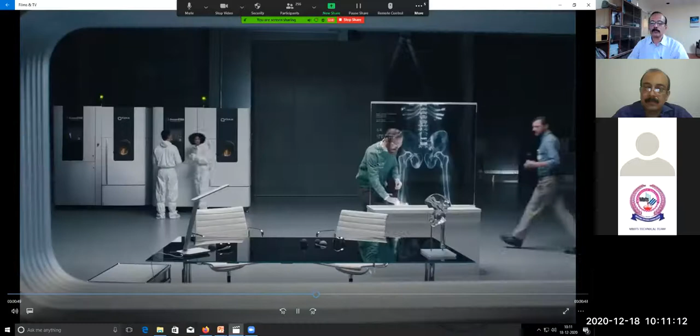And inside the factory, what did she find? A brilliant invention, one of a kind. "3D printing magical parts to help the whole world. A magnificent find for one little girl. As she departed, her mind did sing the song of a factory that can make anything."

So that is it. So slowly this 3D printing is going to revolutionize manufacturing, and instead of very specialized operations, you are going to have factories that can make anything. That was what the video was about.

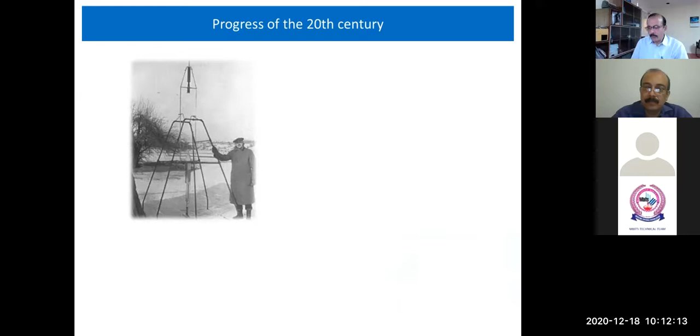Now, coming to the progress of the 20th century, I put a picture here. How many of you know who this gentleman is? He's none other than Goddard. Then this is the first liquid engine ever made by mankind in 1926.

Now, over a couple of decades, if somebody can have a look at this and guess what this is, this is the F1 engine of the 1960s, which propelled mankind onto the moon. So you can see within a short span of around 34 to 40 years, mankind went from a small liquid engine to a huge, massive liquid rocket engine, the size of say 7 human beings and another 3 humans tall. So these are the remarkable progress of the 20th century for mankind.

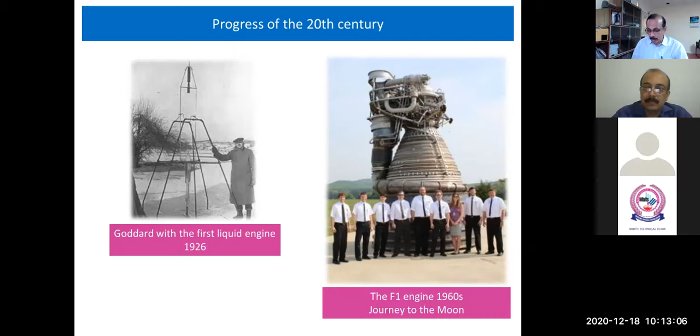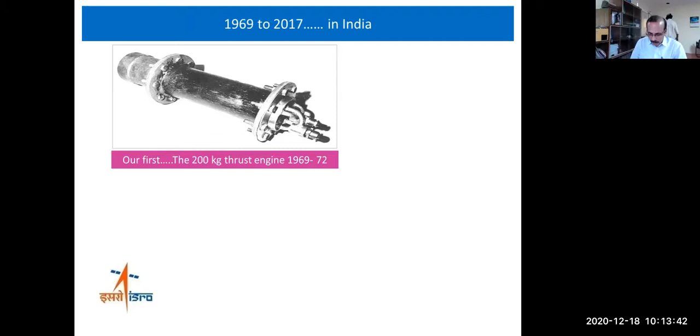Now coming to India, what happened? ISRO was established in the year 1969. So then what happened? If you see a picture here, probably not many will be able to identify what this is, but this is our first engine. This was our first liquid engine. This was made in 1969, 72. And let us see what has happened.

Now, in 2016, we made our first fully indigenized cryogenic engine, the CE20 engine, which delivers an amazing 20 tons of thrust. So from 200 kg all the way up to 20 tons. And it is this engine that propelled our Chandrayaan-2 all the way to the moon.

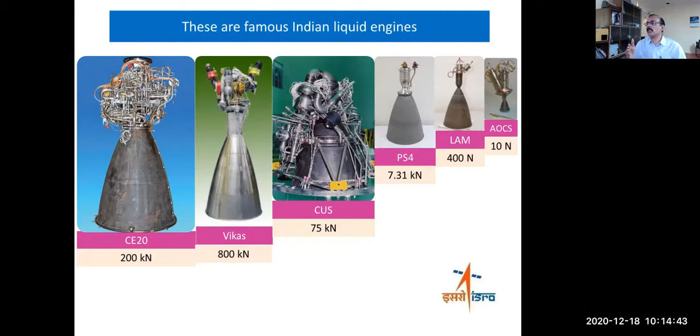And now, these are some of our famous liquid engines, the host of liquid engines that we have. Starting from the left, we have the CE20 engine, then the Vikas engine, then the CUS engine, which is the first cryogenic engine. And then the workhorse engine, the PS4 which flies on the PSLV, and you have all those satellite engines, which we call the LAM and AOCS thrusters. So you can see the CE20 engine, which has got a 200 kilonewton thrust, all the way down to 10 Newton AOCS.

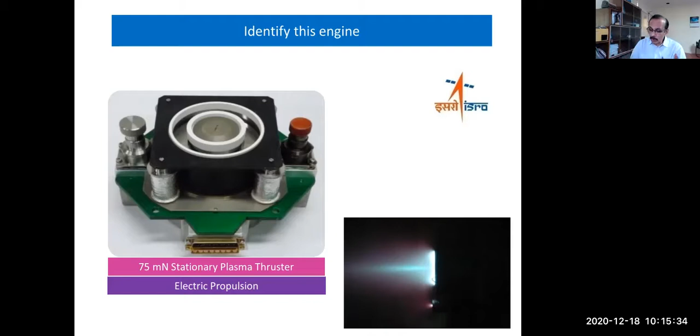And if I have tickled your imagination, this is what we call an electric thruster. So what is the thrust? 75 millinewton. So we started from 200 kilonewton and we are now at 75 millinewton. So a host of engines and thrusters have been developed by ISRO.

And then the question is, why do you require so many rocket engines? The speaker has presented 3 slides full of rocket engines. Why do you require them? Now, can anybody take this question? How many rocket engines are in a PSLV?

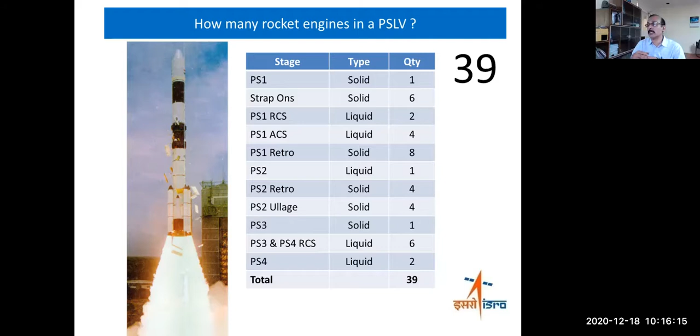So you can start counting. Somebody will count 4, 10, 20. The answer is 39. So one PSLV flies with 39 rocket engines, not all very big ones, including the small ones. They are all rocket engines. So this is why we say there is an amazing scope for 3D printing in aerospace.

So probably at least some of you, the next generation who are listening to this, will finally be working on an additively manufactured rocket engine here in ISRO. So this is our dream.

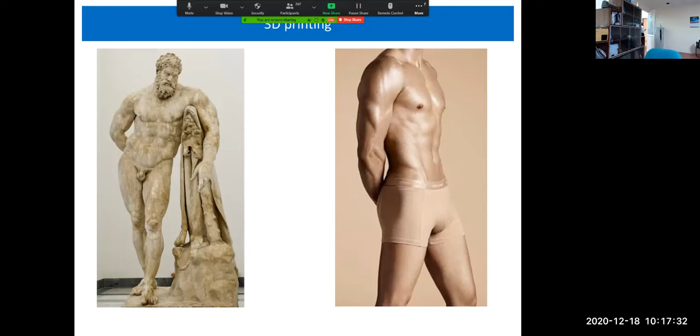Sorry, gentlemen. So probably I gave you a little bit more time.

Now this is it. The first one on the left is the subtractive manufacturing. The first one on the right is the additive manufacturing. Left, yes, how do you make this idol? So you take a big piece of marble and then you have a sculptor, Da Vinci or somebody, goes and sculpts chip by chip, it is removed and then it comes out as a marvelous sculpture. Whereas on the right, you see, that's a human body.

So I would say human body is the ultimate of additive manufacturing. Just imagine how small you were when you were born, 2.7 kilos or 3 kilos, and look over a period of time how you built yourself up from inside. So I would like to say human body is the ultimate of additive manufacturing. And why do you say? Just look at the muscles. This is the same thing that additive manufacturing can do. That is, you can have topology optimized designs.

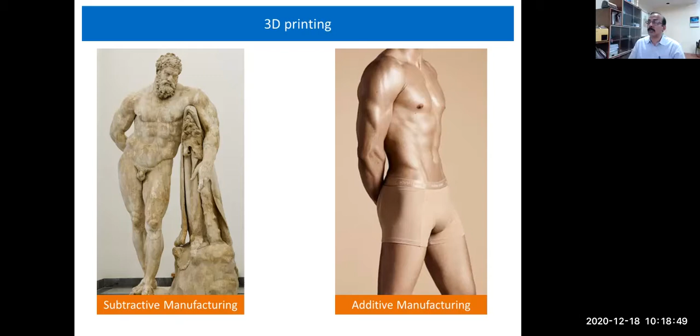If you want to have good biceps, okay, you work out on your biceps, you build up your biceps. If you want to have a six-pack, okay, you work out on your stomach abs and develop the muscles. This is the same thing that probably 3D printing can also do. Just look at the one on the left and one on the right. Yes, I would say that is topology optimized on the left, and on the right you have a failed additive build.

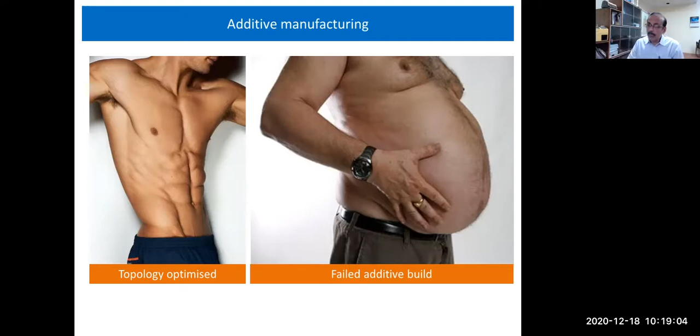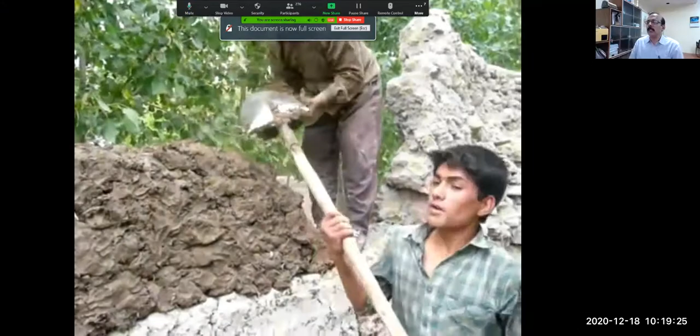So here, according to me, 3D printing is a primitive concept, but a promise of the future. Now, why do I say a primitive concept? I'll just put a video. So if you can see this, I would say this is 3D printing. Probably many of the new generation would not have seen this, but the older generation definitely will say, how do you build this? So you are building it layer by layer. Just look at the skill. So you build it layer by layer. This layer by layer building, according to me, is nothing but additive manufacturing.

But why do I say the promise of the future? Here comes the next video. The same thing, this is how you can 3D print and build a house. This is a 3D printed building. So this is what is happening. This is why I would say it is a technology, an old technology, but this is what is going to happen as a technology of the future. And this is the promise of the future.

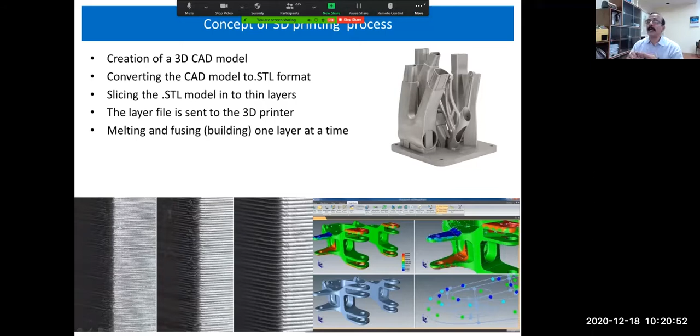Now, the concept of 3D printing, many of you would already be knowing, and probably the last two speakers would have gone through this. My presentation would not be technology packed, but a little bit more interesting for the laymen and the students. The technology of 3D printing is you have a CAD model, you have an STL format, you slice it into thin layers, and then you print it layer by layer. So you melt and fuse layer by layer. So this is the concept of 3D printing.

But this is all told in very simple language. When you apply that to aerospace, it's something a little different. It's not doing hobby work. It's a bit complicated. Imagine that you are going all the way from here to Delhi. Probably you will take a taxi to the airport, catch a flight, go to Delhi and take another taxi from the airport. Yes, that's a hobby job.

But then just look at the American president coming to India. Some of you know he has his Cadillac One. So the car has to come from there. Then if he has to move from the Ahmedabad stadium to the airport, he requires a helicopter. So the helicopter has to come down. Then from Ahmedabad, he wanted to fly over to Agra. His Air Force One doesn't go there, so he had to bring his Boeing C-32. So all these things have to come in advance.

So in a similar way, when it comes to aerospace, 3D printing is typically an all-encompassing process model. So you will require a good CAD model. Not only a model, you will require good CAD processing files and processing hardware.

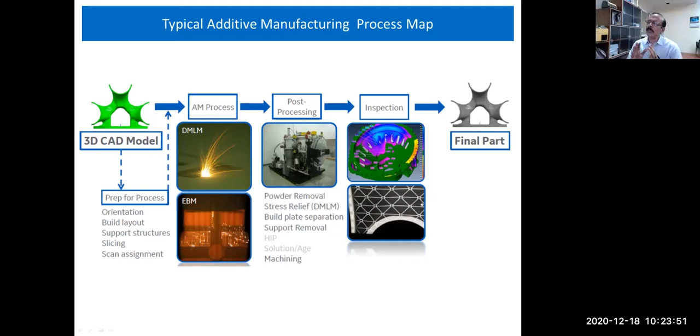Yes, when it comes to aerospace, inspection is very, very important. It can be an X-ray, it can be a dye penetrant test, and on the higher end, you can go for a CT. And then finally, you go for a final part. So when applied to aerospace, 3D printing requires a little bit of holistic thinking. So these are some of the benefits that we derive.

The manufacturing costs are going to be high. And you have a limitation on the build size. And of course, existing designs may not always be suitable for 3D printing. So you might require a changeover to design for 3D printing.

So the most popular 3D printing is the DMLS or the SLM, selective laser melting, or direct metal laser sintering. All this comes under the powder bed fusion technology, wherein you lay out a powder layer, then you fuse it, and you put the next layer on top of that, and then again fuse it layer by layer. So this is how it goes.

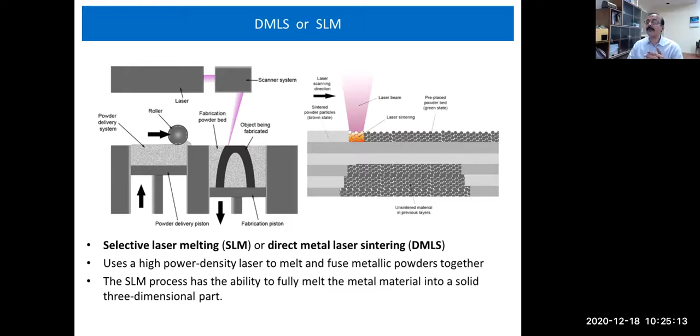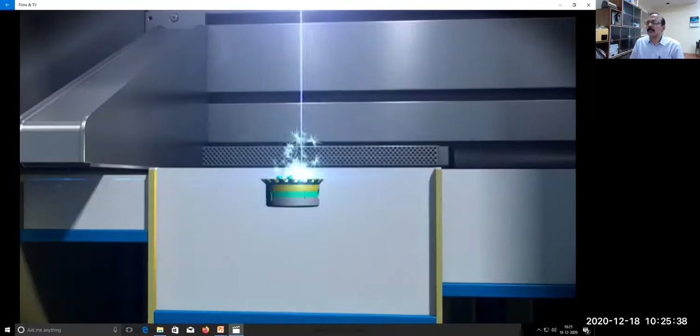So just a video of that. This is how it happens. You have a computer which slices the image. You have put one layer. The layer of powder is added. There you are selectively melting it. The next layer, melt, layer, melt. So you again melt, and finally you have a finished part like this. So this is the DMLS, or the powder bed fusion.

And then for larger parts, we have something called laser engineered net shape, what we call LENS, wherein you have a deposition head, which has got a laser head, and a powder dispensing nozzle. The nozzles dispense powder, and a laser beam comes in and melts it. The entire thing is mounted on a gantry or a machine that manipulates your nozzle so that you get your part. These can be used for much larger sizes.

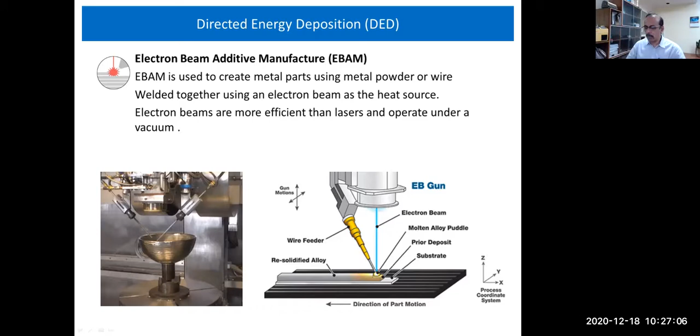And then you have something called electron beam additive manufacturing. Almost the same as LENS. Only thing is that with the laser you are using blown powder, whereas here we use wire as the raw material. An electron beam comes and melts the wire, and with the same manipulation of the machine on different axes, you build a part layer by layer. The advantage of electron beam over laser is that it operates under vacuum, so you don't have the challenges of corrosion.

Now, for any scientist or any artist or any human being for that matter, what is the advantage? The additive advantage is, one part and you have limitless possibilities. So what is it that you want? The one in the middle was my requirement. I wanted 4 holes and 2 holes on the fork. Then you can do it any way that you want. All the others, 8 different versions. So one part, you can have 8 different concepts.

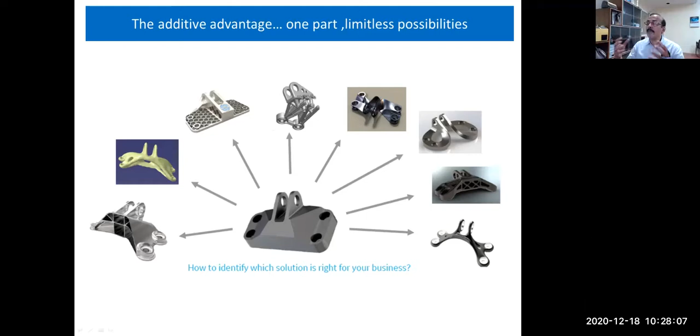So this is the advantage. You have one part, you have limitless possibilities. You want to make it look good? Yes, you have a design. You want to make it robust? Yes, you have a design. You want to make it lightweight? Yes, you can have a lightweight design. So this is the advantage of additive.

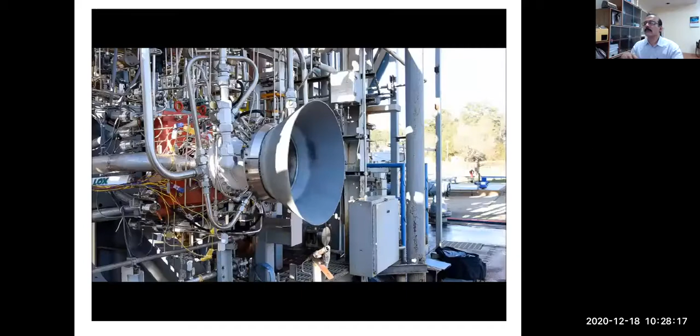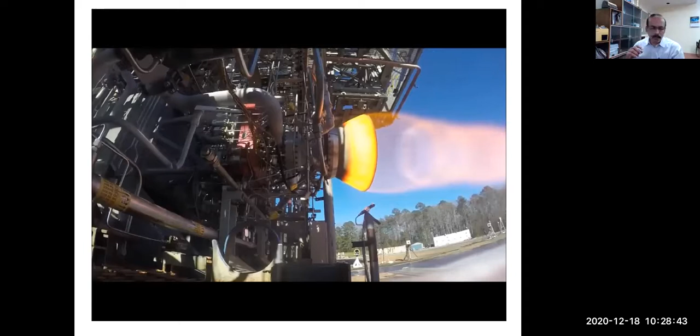Gentlemen, if you are seeing this video, what is this? So this is the first additively manufactured rocket engine that has been fired by NASA. You can see a rocket combustion chamber fully additively built and which has been fired at NASA. So this happened in 2018. So in May 2018, they printed this 3D printed thrust chamber. So they say the test duration went for around 25 seconds with 100% power, and the hardware still remains in

a great shape. So what prompted NASA to go into 3D printing? So they have a goal, and their aim is to reduce time and cost. So all American products are expensive. Probably if they want to compete in the market with the Chinese or the Indians, they have to reduce the cost. So how do you reduce the cost? You have to reduce the time. So this is what they are looking at. Reduce the time and cost towards building a rocket engine. So this is what they did.

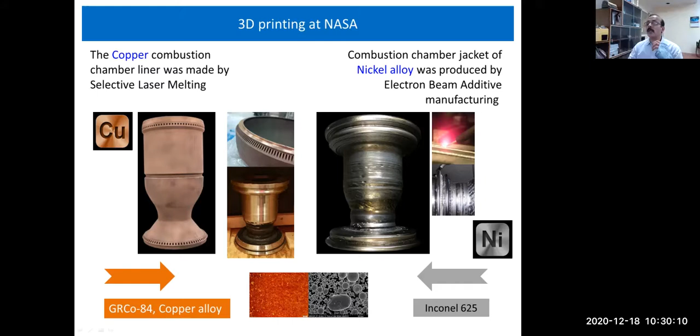This has got a sandwich construction. So most of the cryogenic rocket engines will have a sandwich construction. The inner core will be made of copper. This is what you see on the left side. And you can see on the figure which I am pointing to, there are a lot of channels, coolant channels on that body. So the copper has got a very high... and the heat has to be taken out. So that is taken out by coolant flowing through these coolant channels. So the copper gives you conductivity, permits you to take away heat.

But then what is the minus point? The minus point is you don't have strength. So what is it that you want? You will like to have a jacket over it. So what they've done is they've put a nickel jacket over it. So this nickel jacket gets you the strength. So this is what you have, a combination of a copper alloy and a nickel being printed. So according to the information available, this copper liner was built by selective laser melting, that is DMLS, and then the nickel layer was built by electron beam additive manufacturing. So you have a hybrid process coming up in 3D printing.

You see this? And this work was done by 3 NASA centers. So there was one center working on the powder, another center working on the chamber, and another center working on the nickel jacket. And you see, there were around 200 intricate channels, and this whole chamber was built of around 8,255 layers of copper alloy. So then the question is the time taken. How much time did it take? What was the big advantage? Anybody can make a guess. So they say it was printed in 10 days and 18 hours.

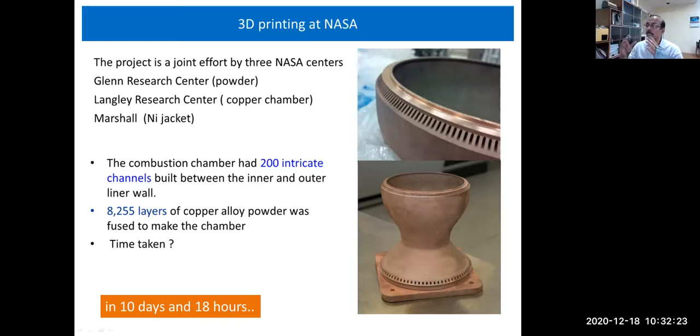So ISRO are also making these double wall chambers the conventional way. For us, this takes a minimum of around 6 months. So you have a copper sheet, then you form it, then you deep draw it, you cut all the channels, then you machine the edges, then you go for brazing and all that. It takes approximately 6 months. So compared to the 6 months, the advantage these people have is 10 days and 18 hours. It is not that they just plugged in a printer and started a stopwatch and in 10 days it came out. Definitely the developmental time would have been much higher. But ultimately the result is they can print in 10 days and 18 hours.

And now NASA is also working on another program called RAMPT. So their idea is to build a whole thrust chamber with additive manufacturing. So you have bimetallic manifolds, then inside you have copper, then you have a composite overwrap. They're talking about composite 3D printing. And you have a free-form nozzle using blown powder laser technology. Using laser technology, you will be making the nozzle extension. So this is what they have in mind.

And now in LPSC also, this is what we have in mind for our LOX methane engine. We are also planning to have a double wall construction, where the inner will be copper and the outer will be made of stainless steel, with approximately 300 channels.

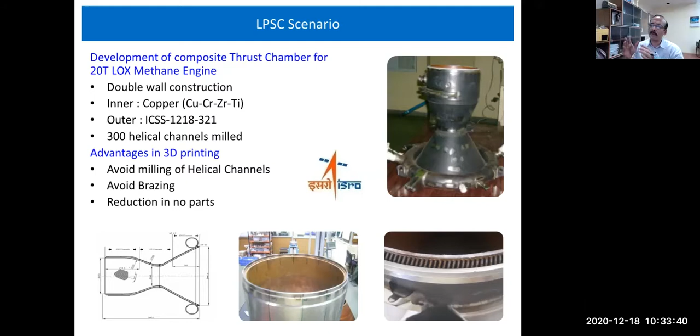So we will be avoiding all the brazing, and we are also aiming for a reduction in number of parts. Of course, this is just a dream now, but we have to work on this. And probably this is one challenge for at least some of the youngsters who are listening: a fully 3D printed rocket thrust chamber in India.

And coming to Ariane, the Europeans and their Ariane. Okay, so they are also into 3D printing. So they are talking about an injector head. Normally an injector head, this is an injector head for the upper stage, the rocket engine. So now what do you have?

In an injector element, in the conventional process, you will have around 8,000 holes which are drilled in copper sleeves, and they are all screwed onto 122 injector elements. So you have 8,000 holes. They are made of different number of parts, 122 injector elements. This is the conventional way of doing it.

Now, what is their idea? By 3D printing, this entire thing with the injection nozzles, the base plates, the front plates, the manifold, etc., everything they want to print as one integrated component. And they are also working on it. I think you can see in the picture that they have already been successful.

So the advantage is, they say the total components is cut from 248 to 1. The figure on the right side, made of 248 parts, has been reduced to 1. Normally, in a conventional process, this takes around 3 months, casting and a lot of machining, 3 months. But they have done this by 3D printing.

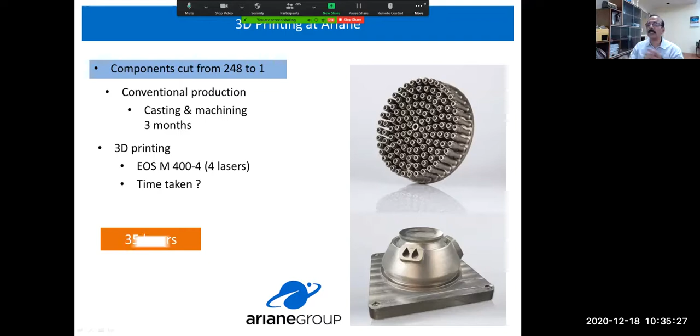So can somebody imagine what is the time taken? Any guess? Yeah, here it is. It's just 35 hours. So from 3 months all the way down to 35 hours. So this is the progress that they are trying to look at. And at LPSC also, our aim is, for our LOX methane engine, to print this injector head as one integrated component.

And definitely, ladies and gentlemen, it's not that you can just simply take any design and print it as a component. These types of complicated parts have to be designed for 3D printing to be realized. So we have to work on design for 3D printing also.

Now, Ariane is also working on a next generation rocket engine called the Prometheus. They want a very low cost engine, at least 10 times less than the present engine. This is what they are working on.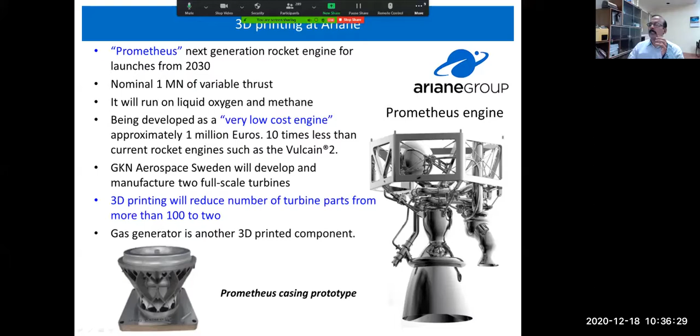And the turbo pump of this particular rocket engine, they are planning to 3D print it. And their aim is to reduce the number of parts from 100 to 2. So just look at it. From 100, they want to reduce the number of parts to 2. So this is the advantage they are working on.

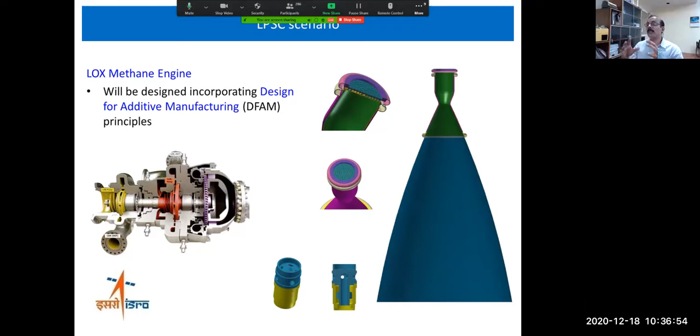And this is the same challenge that we are also working on for the LOX methane engine, the same engine that I have been talking about. We are also working on a turbo pump made through the additive manufacturing route, giving us advantages of time and cost.

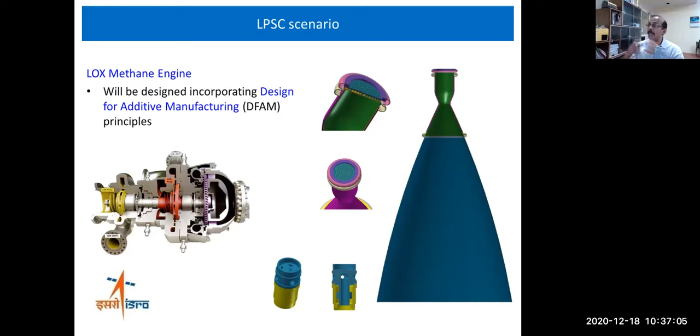So what has happened? The total nozzle earlier used to be made of 1,000 parts. Now it is made of just 100. That means the parts count is less. What happens? Definitely the cost also comes down, and the spin-off is reduced production time.

This goes on to the Dragon spacecraft. Around 2 months back, they had the first successful flight of a spacecraft from SpaceX all the way to ISS, and it was repeated also last month. So these are the 3D printed engines for the launch escape system.

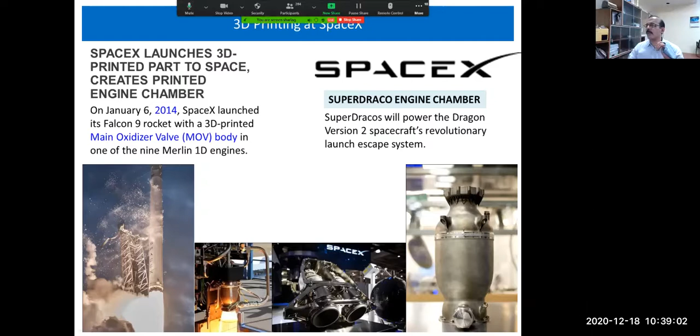Any manned mission will have a launch escape system for the humans to escape the launch vehicle in times of a catastrophe. So what they have done is they have 3D printed the entire SuperDraco engine.

Normally in all rockets, if you have a pump, the pump has to be rotated. So to rotate a pump, we will have a turbine which is driven by hot gases. But what these gentlemen have done is, it's a small rocket engine, so they did away with the gas generator generating hot gases, and instead they put in a battery and a motor to drive the pump. So it works on an electric motor. So you can say, okay, space is also moving electric.

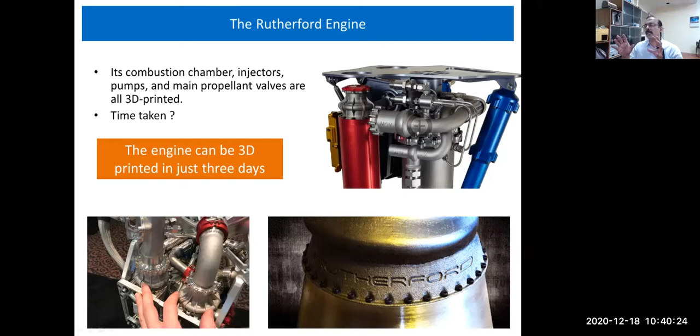So this particular engine was also largely printed by 3D printing. You can see the combustion chamber, the injectors, pump, the main propellants, all these were 3D printed. And if you can just guess what is the time taken. See, gentlemen, this engine can be 3D printed in 3 days. So this is the type of reductions that these people are working on. An entire 3D printing happening in 3 days.

And in the LPSC scenario, we also don't want to be left behind. Okay, you can say we are also trying to copy. Okay, no problem. We make a very honest and a sincere copy. We are also working on an electric pump for the LOX methane engine, which is going to be additively manufactured.

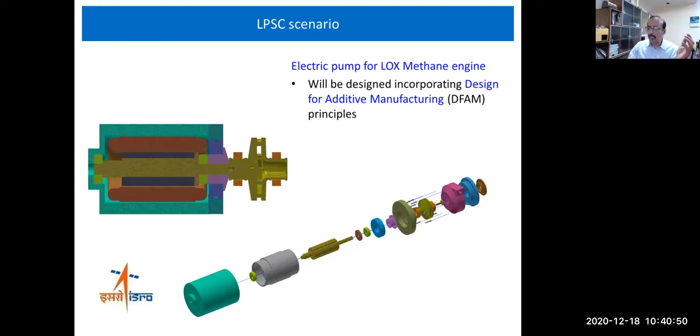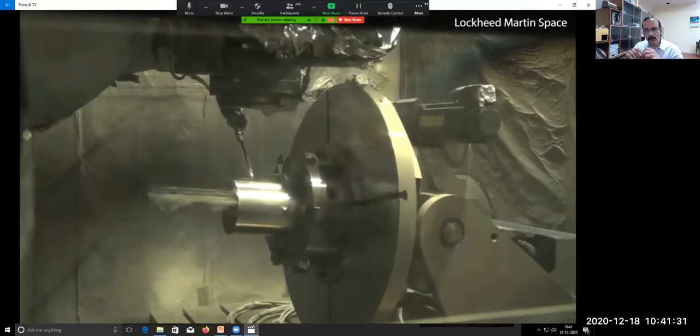Am I audible, sir? Yes, sir. You're audible. So this is one problem with the net. You do not know whether you're audible, whether people are responding, and all that. Okay, that is a challenge.

Just look at how electron beam additive manufacturing works. So you have an electron beam. The bright spot is the electron beam, and you have a wire. Probably it is hidden there. And you have a turntable which rotates all around, and material is deposited layer by layer. There you see the shape has almost come. Now the shape is recognizable. There it becomes bigger and bigger. So that is electron beam additive manufacturing with wire.

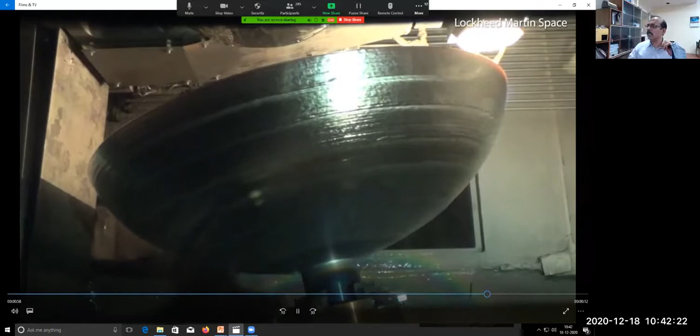So you can see how they're there. This is what they're targeting: twice as fast at half the cost. So that's a multiple of 4. They want to do it 2 times faster and do it at half the cost. So you can see this whole titanium dome by 3D printing. They have reduced the timeline. So you can try to fill up the blanks here. They have reduced the timeline from 2 years to 3 months.

So one satellite tank, which used to take a long time from billet. You start from a billet, you convert it into a forging, machine it, EB weld and test and all that. You will take 2 years from material to a finished product, whereas in EBAM, you are reducing it all the way to 3 months. Just imagine the amount of reduction of work in process inventory. The work in process inventory is reduced to a large scale. So all these things are going to reduce the cost of any rocket engine.

And you might say, this is going to be a challenge. What is the benefit that we have? Now, the lesser the cost, you will have more people coming in. You will have startups. You will have new people with lesser finances coming in and coming out with technologies for telecommunication, weather forecasting, or whatever it is, at much cheaper prices for the common being.

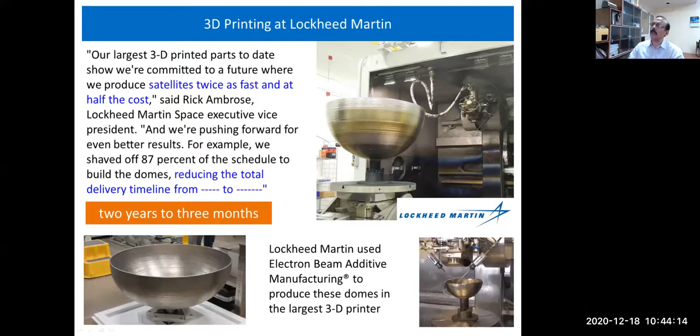Today, if you would see, at least in India, probably 80 to 90% of Indians are not connected at all. So they are away from internet. So the country has to connect. Yes, we have to work on low-cost solutions. And we are also working on the 400 dia propellant tank by 3D printing.

Then there is a company called Relativity Space. It's again in America. They're talking about from raw material to flight in less than 60 days. This is what they are talking about. From raw material to flight in less than 60 days. Now, you have heard of SpaceX, Blue Origin and all that.

We all consider them as pioneers, who work on cutting edge technologies. But there were two gentlemen who were complaining. They were working in SpaceX and Blue Origin. They were complaining that SpaceX and Blue Origin are not doing enough in 3D printing. So what did they do? They came out and started a company called Relativity Space.

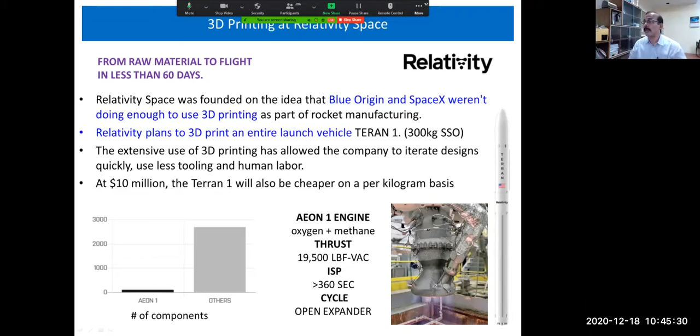And what is their idea? Their idea is to print an entire launch vehicle. Just imagine an entire launch vehicle, not a turbopump part, not a thrust chamber, not a tank. They want to print the entire launch vehicle by 3D printing. And they are saying that this will be the cheapest on a per kilogram basis. So for that, what is it that they are doing?

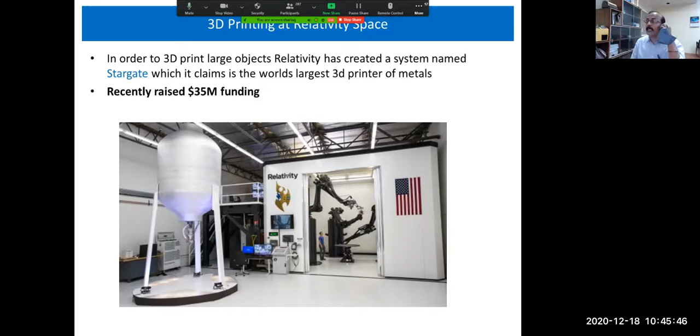They are building a 3D printing machine as huge as this. You can see, compare it to the scale of a human being there. And it is not a crazy idea. They were able to raise funding of up to $35 million. And just look at their trial 3D printed rocket stage. This is what they're talking about: print an entire stage by 3D printing.

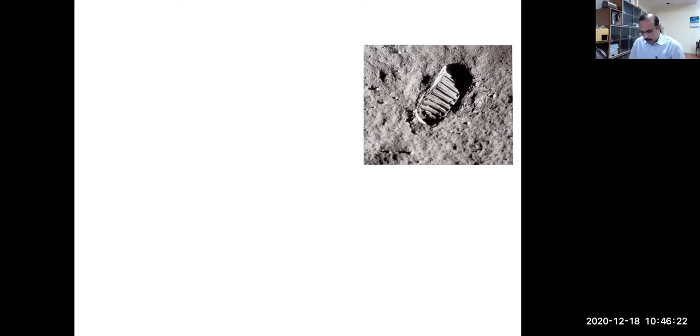Now, gentlemen, this is a very famous photograph. Can anybody imagine what it is? Maybe the elder generation might understand it faster. Yes, it is Neil Armstrong's footprint on the moon. Now, why is it that you have such a big impression? It's because of the lunar dust. There is a thick layer of lunar dust, and the particle size is on average only around 70 microns. Does it give you an idea? A very small size of dust available.

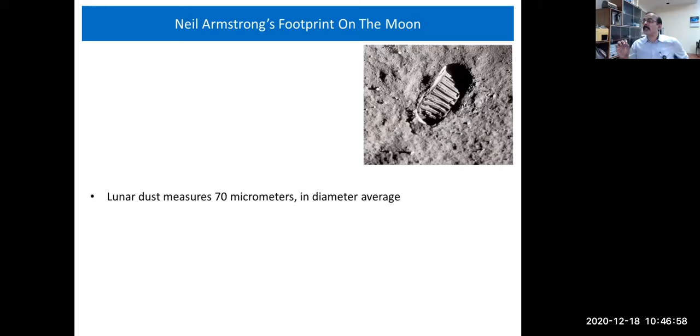Now, this is the best raw material for 3D printing. You can consider building a lunar base with 3D printing. You have the lunar dust available. You mix the dust with a binder and spray it. You have 3D printing machines working on it, and then you have a binder salt that can be applied to it. And what is it? You can build an entire habitat.

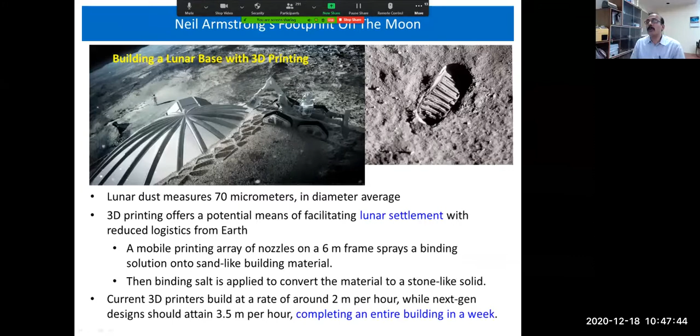Now they are talking about 3D printers which can build around 2 meters per hour. So you can think of printing an entire building in about a week. So you want to have a settlement on the moon? Yes, you have the raw material readily available there. And NASA has also worked on this. There is a 3D printed habitat challenge, a $3.15 million competition to build technologies to have a habitat on the moon or Mars or wherever it is.

And what is the spin-off? How many of you know that Velcro, the Velcro that we always use to fasten things, was a spin-off of man's moon mission, the Apollo mission? How many of us know? So similarly, you are going to have 3D printing in housing. It can be used for affordable housing on the earth when this technology is developed.

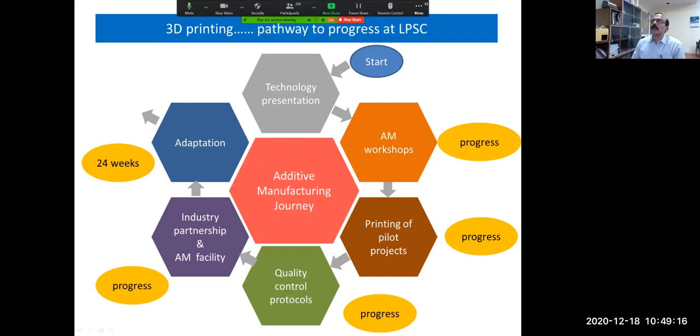Now, we are also not too far behind at LPSC. So this is our additive manufacturing journey. We start at the top right and move around in a circle: technology presentation, AM workshops, printing of pilot projects. All this is our pathway to progress, all the way from technology presentation to adaptation. And this is our roadmap. What we have identified is a DMLS process for parts up to 400 mm cube and an EBAM process for bigger tanks and sizes.

The benefits that we are looking for are complex shapes, weight reduction, monolithic construction, that is, reducing the number of parts, faster production, and design iteration. Suppose you're working on a LOX methane engine, you work on a prototype and then you would like to fine tune it. You would like to have the next prototype ready immediately. So 3D printing gives you that flexibility of design iteration and faster design to realization. And our overall goal is to replace at least 25% of the flying parts with 3D printing.

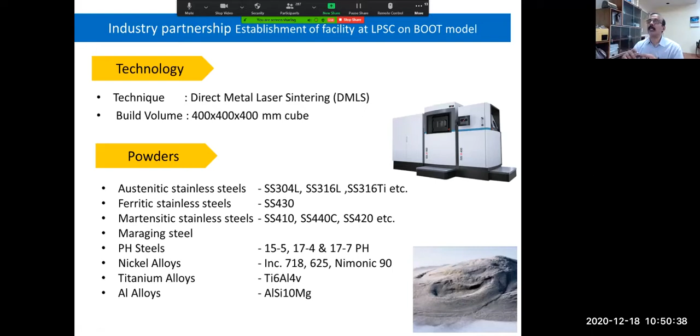We are talking about industry participation for establishing a facility at LPSC on the BOOT model. So we are inviting an industry to set up a facility at our own place. They can own the facility, and we will load them completely. That is the BOOT model, a build, own, operate and transfer model. The facility will be set up and run by an industry, and after 3 years, the facility will be transferred to LPSC.

So LPSC will provide all the civil infrastructure, and it will also give the work or completely load the facility during the initial 3 years during which time the industry is working on it. So now what is the idea of this? There is a thinking that we are already a little behind time in adopting 3D printing technology. So if you start reinventing the wheel, you will take a longer time.

So the idea is there are people who are already established, people who are experienced. You use their experience and do your parts, and then you slowly build up. You work with them and build up your expertise. And also the BOOT model permits a lot of design iteration. It permits experimentation, and it gives us flexibility in operation, so that the parts can be printed on demand.

Suppose if I want to give a part to be printed outside, we have all those procedures, commercial procedures. So we want to get out of it, have the facility here, and then you have the flexibility of parts. And then definitely, you have the lesser financial burden and all that. So we have already tendered out, and the process is already on. A lot of people are showing interest to set up a facility here in our campus and work with us.

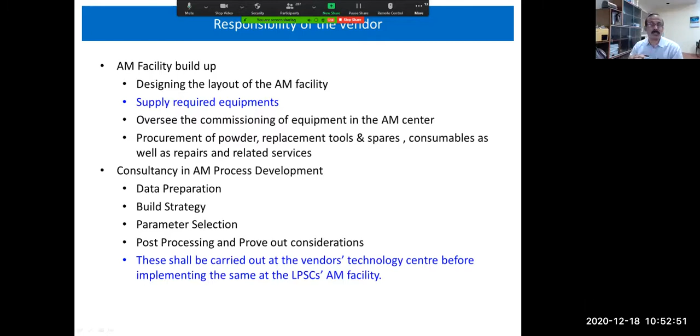So we have told this is the responsibility of the vendor. He will set up the facility here, and he will also give us consultancy in the process development. That is the data preparation, build strategy, parameter selection, etc. So we are riding piggyback. We are riding on somebody who is already experienced. I will not dwell too much on this.

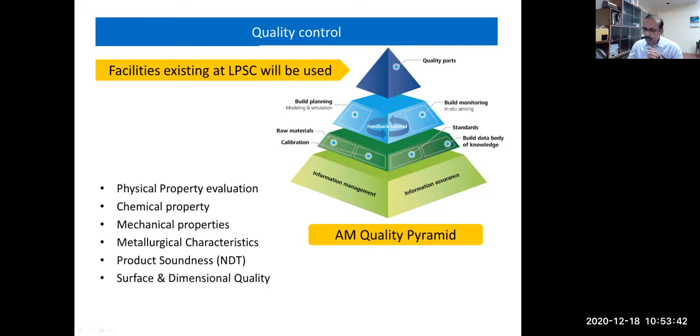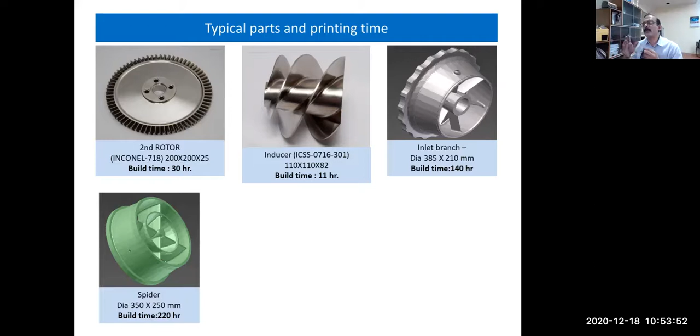And these are the typical parts that we have identified. You can see a host of complicated parts that we have identified that could be 3D printed. And there are some other parts that are highlighted here. These are structural parts, rotating parts, and functional parts. All this wide combination of parts we have already identified for 3D printing, and some of the interface elements also.

And we are also thinking about powder development for the future. So the future, I think, is the challenge for some of the youngsters who are listening to this. In a big way, we would like to go for 3D printing. It's not only just printing, go all the way back and develop powders also.

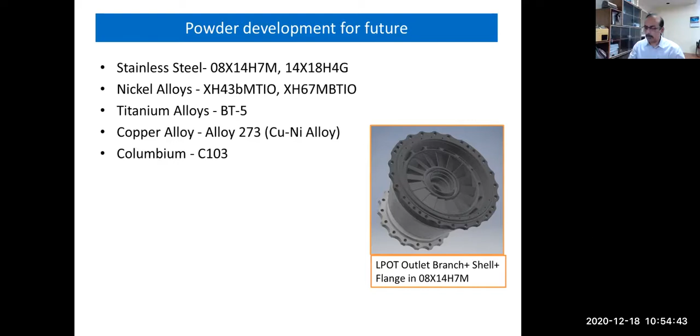And how does this attract us? Just look at the turbine parts. Just look at the blade profile. I've selected a particular turbine part, and you have around 60 vanes. What you can see on the right side is a shrouded rotor. So you don't have access from the sides. This is a closed rotor, so you have access only from the top.

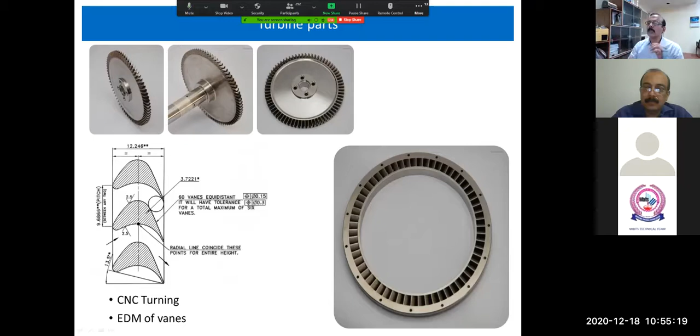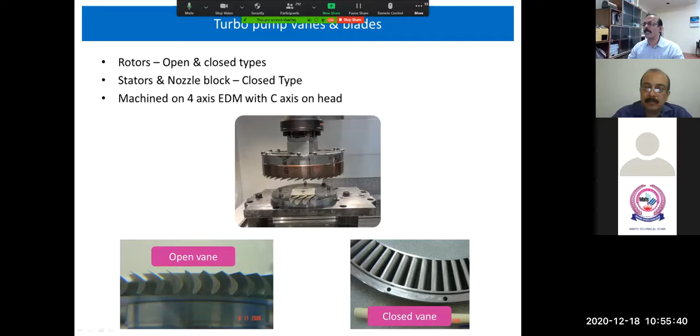So normally this is done by EDM. So you have the open vanes that you are seeing on the left-hand side, and you have the closed vanes on the right-hand side. And we do it by EDM. At least some of you will be knowing EDM, that is called electrical discharge machining.

So you will require an electrode. You build the shape of the vane onto the electrode, and then you erode it. And this is not eroded with one electrode. You have two electrodes that are eroding it from the top. Then you reverse the job, put it the other way around, and then you erode it from the other side to complete the profile.

And ladies and gentlemen who are listening, this particular part alone takes us approximately 15 days in 3-shift operation. That is the EDM going around. And you know, this EDM removes only very, very little material at a time.

So the part comes out only after 15 days. So the machine works continuously, and what we now have is an IoT machine. It's linked to the supervisor's mobile. So if the machine stops for any reason, he gets an alert at any time of the day. He goes and sets it up, resets and runs it again. Otherwise, you are not going to meet the schedule of even 15 days.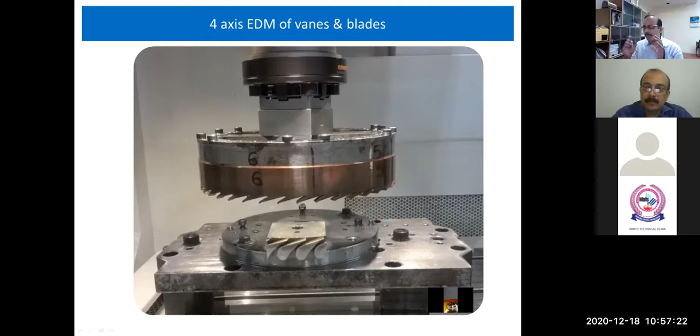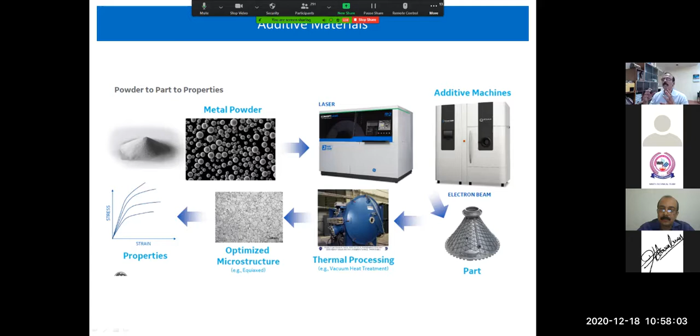So this is an apt example to be 3D printed. And now, if you see from powder to part, and then all the way to properties. So you have a powder. This is the challenge in aerospace. From metal powder, you print, then you get a part, then you have thermal processing. It can be vacuum heat treatment, and it is required to modify and optimize the microstructure. Very, very important, so that we get the required properties.

And these are the powder versus the process size. If you are going for binder jetting, you require a powder of 20 micron size. Then for your direct metal laser, you can go up to 50 micron. Anything beyond that, 50 microns and above, you have to go for electron beam melting. So this is the powder size with respect to each process. And anything above 100, then you go for the DED process, that is the laser deposition.

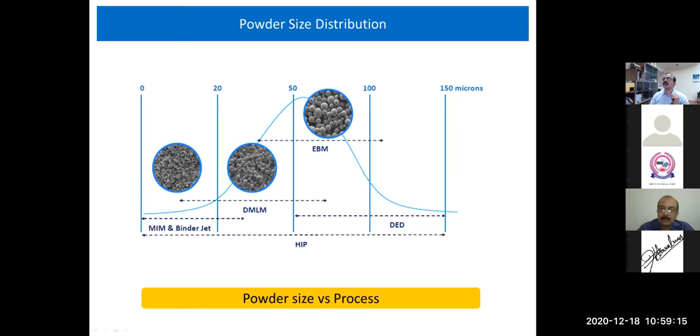And definitely all these parts have to be HIPed, that is hot isostatic pressing. You put the part into a furnace, we call it a HIPing furnace, and you apply temperature and pressure. All the pores will close down, the grains deform so that it closes down, and you get very high strength.

Then, what is the science? The science is this: you have the machine parameters, plus you heat treat, then only you will get the material properties. For example, the first micrograph you see is the micrograph as printed. You can very clearly see the layers. It is layer by layer, like a brick wall. It is built layer by layer.

But the disadvantage is this has very poor strength, and you can talk about the slip planes and all that. So this type of microstructure has very poor properties, and by heat treatment you have to convert it into a totally isotropic microstructure. So this is the science behind 3D printing when you apply it to aerospace manufacturing.

And how is it different? Just look at the microstructure in casting. You are melting, heat treating, and machining. This is the microstructure that you have. And in a wrought product, you melt, you cast it into an ingot, and then you forge it, and then heat treat it and machine it. This is the microstructure that you have.

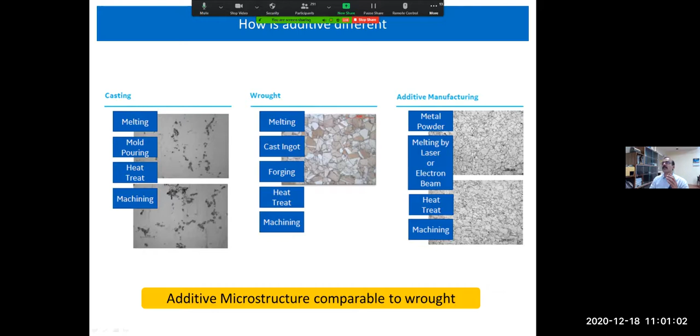Whereas by additive manufacturing, you melt it, by powder or whatever it is, and heat treat. See, your microstructure is much more refined. So compared to a forging or a casting, additive manufacturing will give you a much better microstructure also. And just look at the impact of heat treatment. As built, this is the property.

Then this is vacuum heat treatment, vacuum stress relieving, the first one. You stress relieve in vacuum, you have a small refinement, then you go to HIP, hot isostatic pressing, you close up all the pores, then you solution treat it, another heat treatment process, and then you age it, another heat treatment process. So you have this microstructure which gives you the best balance of properties.

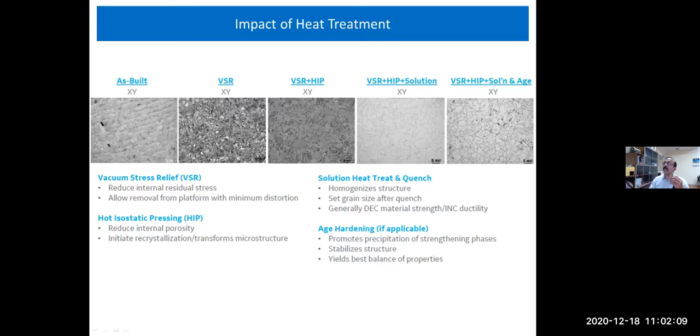Sorry, okay. So, am I audible? Yes, sir. Now you're audible.

So the presentation is not yet visible. Again. Is it visible now? No, sir. Not yet. Yes or no? Sir, I think you will have to share the screen again. Okay. Currently the camera is all right, but the presentation is not up there. Let me see.

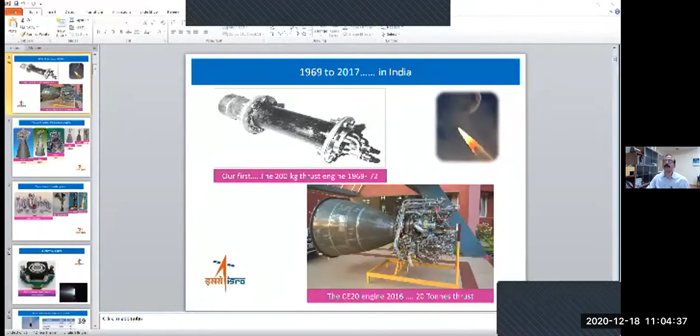Is it visible? Yes, sir, it's visible. So all right, where am I? I am coming down. Yeah, there it is. Am I visible now? You're visible and it's full screen. It's all right, it's correct. Okay, thank you so much.

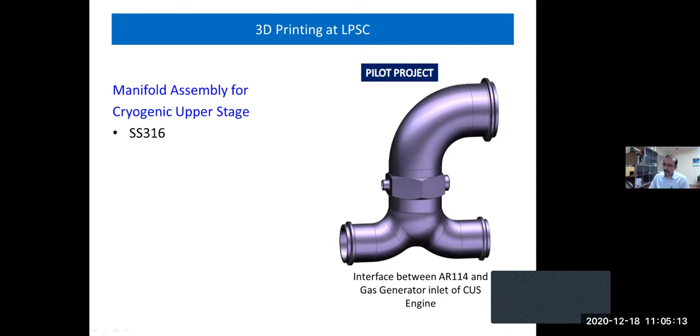So this is one of the parts that we have printed. You can just look at this, made of stainless steel. It's a manifold assembly. You can see the complication. Normally this was built up of around 7 or 8 parts, 3D printed as one part. So we are now doing some pilot projects, 3D printing at our place.

Operating medium is kerosene and it operates at a temperature of around 340 K. And the pressure is very important, 8.3 to 415 bar, very high pressure, and it runs at around 19,000 RPM.

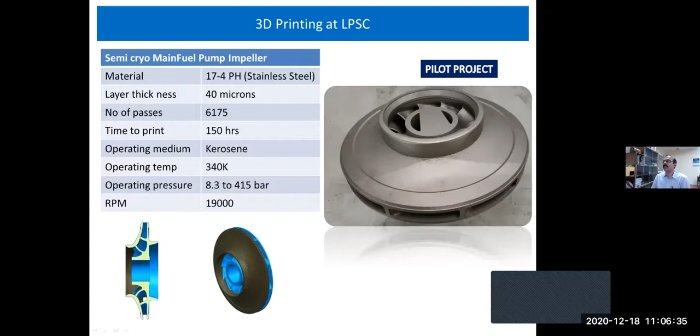That's an amazing achievement. And then this is another impeller, printed with aluminum alloy. So don't get confused, the part in the middle is the aluminum alloy. And as I was telling, for characterization, along with the build, we will have to build coupons. So these are all the coupons built in different orientations.

You have coupons built in the x-axis, coupons built in the y-axis, coupons built in the z-axis, and coupons also built at 45 degrees. So you have to get the properties at all different orientations.

And if you look at how they printed the impeller, it was not face down. You cannot print it face down because of the challenges in putting the supports for the wheel. So this is how it was built. This orientation is a skill. This is a technology. How do you orient an impeller? How do you orient a part with minimal supports? So this is how it was oriented.

The layer thickness is 30 micron, which means more than 4,600 layers, and time to print is around 55 hours. This works in kerosene medium at 320 K. In degrees centigrade, 320 minus 273, say 50 degrees centigrade. Operating pressure, you see, very high, 415 to 565 bar. And the part runs at around 19,000 RPM.

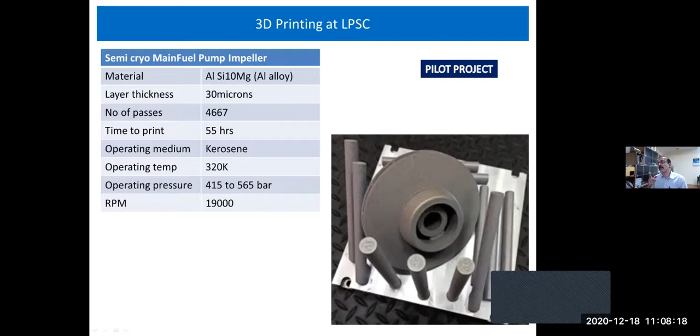And this is yet another one, made of Inconel. So we've been choosing certain materials that could be printed: aluminum, steel, high nickel alloy. Inconel is a high nickel alloy. Layer thickness of 40 micron and 2,850 layers. Time to print is 160 hours. Here the temperature is very high, 740 K, with an operating pressure of 7.5 bar and an operating medium of steam.

Suddenly you will think, sir, how is it that you have gone back to the steam engine era? What is steam doing in a rocket engine? So gentlemen, a cryogenic engine is nothing but hydrogen and oxygen. When there is combustion, 2H2 plus O2 gives 2H2O, which is nothing but water, which is steam. The gas generator in the cryogenic engine generates superheated steam, which drives the turbine. So the working medium is steam for this LH2 exhaust turbine.

And we are also planning to develop a PS4 tank. That's a huge tank. All the examples that I had put previously would go on powder bed fusion. But we are now planning to try to build a tank, probably by EBAM or LENS, so that we can make a huge tank. The technology that we have chosen is DED. You are depositing powder by spray or wire feeding, and melting by laser or electron beam, so you can print large sizes.

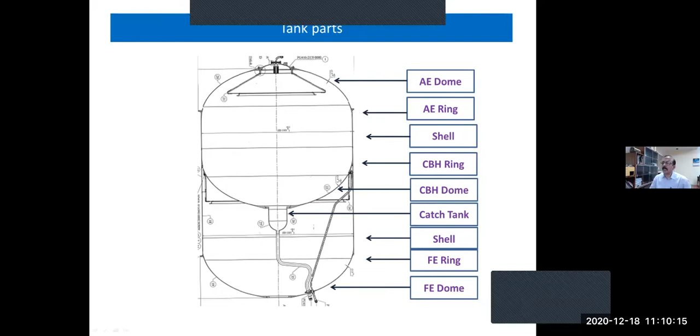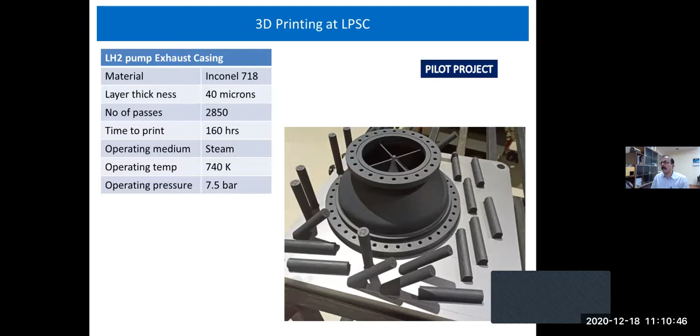And I've come to the end of my presentation. Thank you very much for your patient hearing. Can I stop sharing? Hello? Yes, sir, you can. Am I visible? Can you see me? Yes, sir, you're visible. And I can show you the 3D printed part. Okay. Yes, sir, we can see it.

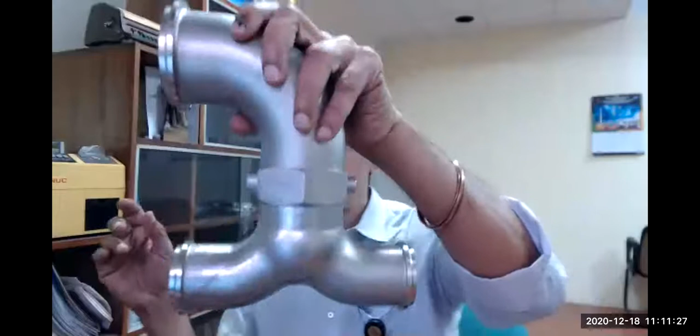It's beautiful. So that's a 3D printed part. Earlier, this used to be sheet metal. Form it, make it in two parts, and then weld it here. So you have one part here, one part here, one part here, another part here. Okay, this is again a machined part. So this we have made by 3D printing. So one inlet and two outlets.

No, sorry, more than that. There is an outlet here. There is another outlet here. I'll just turn it around. So that's one 3D printed part. And I will show you another one. Here it is. That is our impeller, around 4 kilos. I will show you the vanes inside. These are the vanes. This is another view of the vanes. This is the 17-4 PH that I was talking about. And if I can show you one more thing.